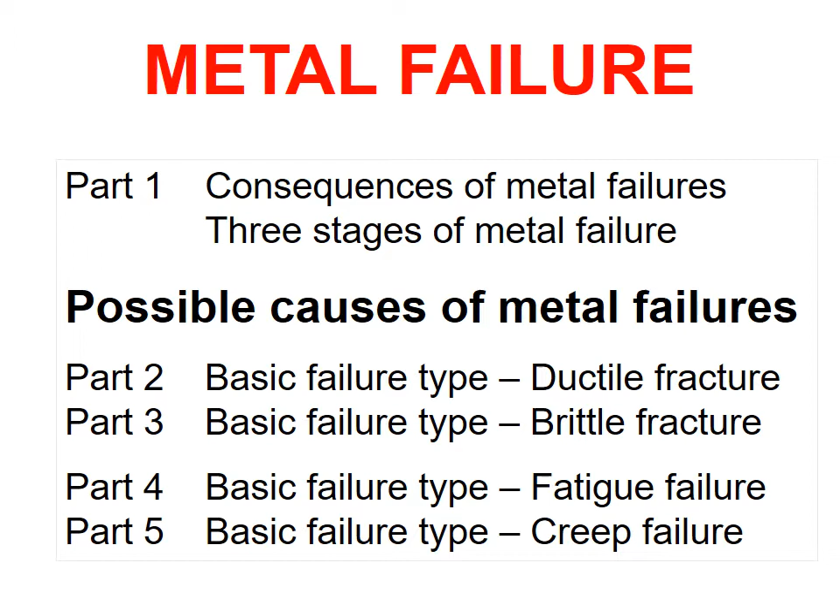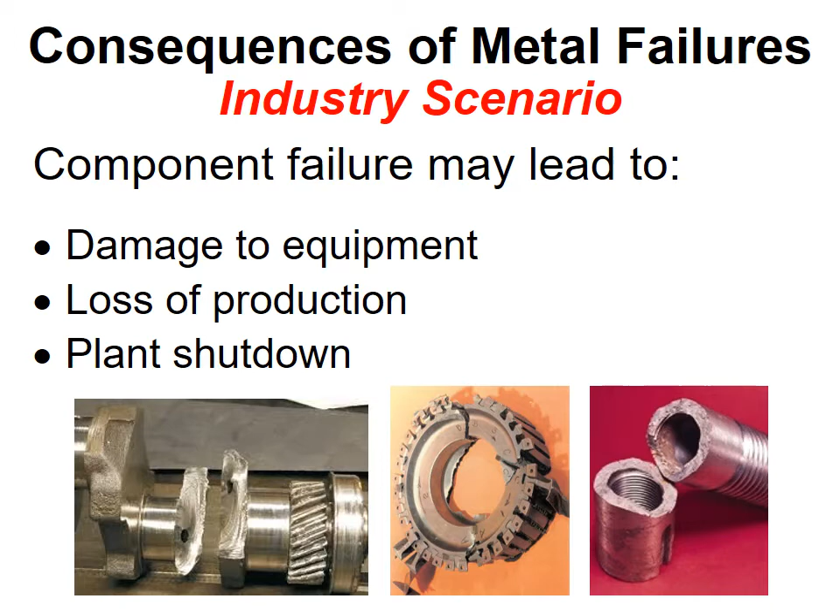In an engineering environment, equipment, or plant machinery, the failure of one unit or even a small component could lead to damage of the equipment and thus may result in shutdown and therefore a loss of production. In a more serious note, failure would inevitably give rise to inconvenience and even the loss of lives. Therefore, understanding the different modes of failure would, in one way or other, help to determine the possible cause or causes of failure and even prevent recurrences.

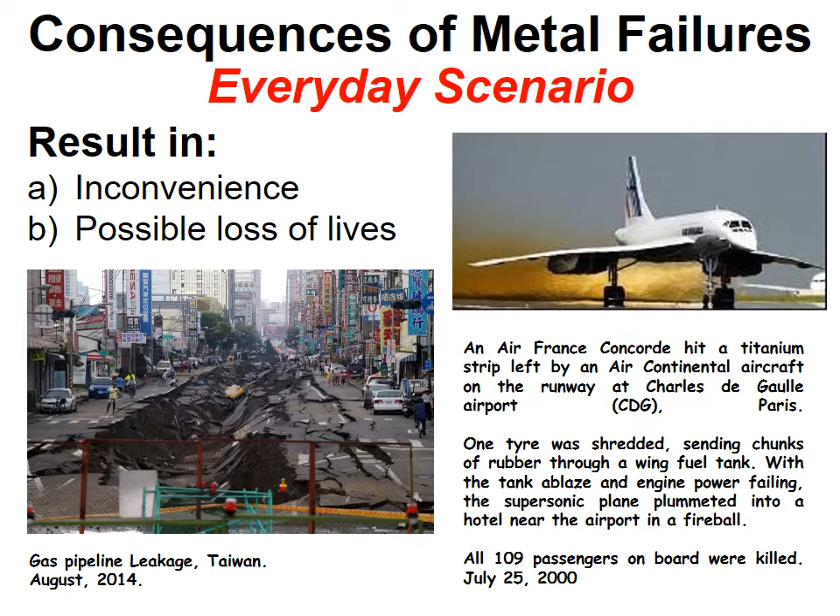Do you know that metal failure was also responsible for one of the worst industrial accidents in history? In Bhopal, India, in December 1984, due to creep failure, a pesticide plant spewed poisonous gases into the atmosphere, and within 48 hours, 1,700 people died. Today, the death toll has reached or even exceeded 20,000.

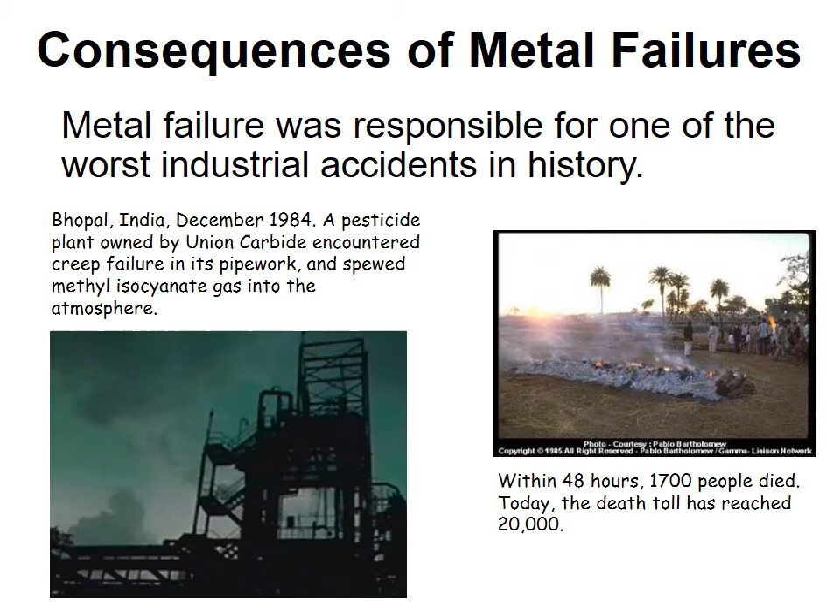Now, let's look at the 3 stages of metal failure. Typically, failures, whether due to cracking, corrosion, poor design or fabrication, environmental conditions or other causes, occur gradually and usually develop in 3 stages. It starts with an initiation point which grows and subsequently results in propagation. The first stage could be detected during manufacture, though it may also develop during operation. The propagation stage is reached when the growth becomes unstable and comparatively rapid.

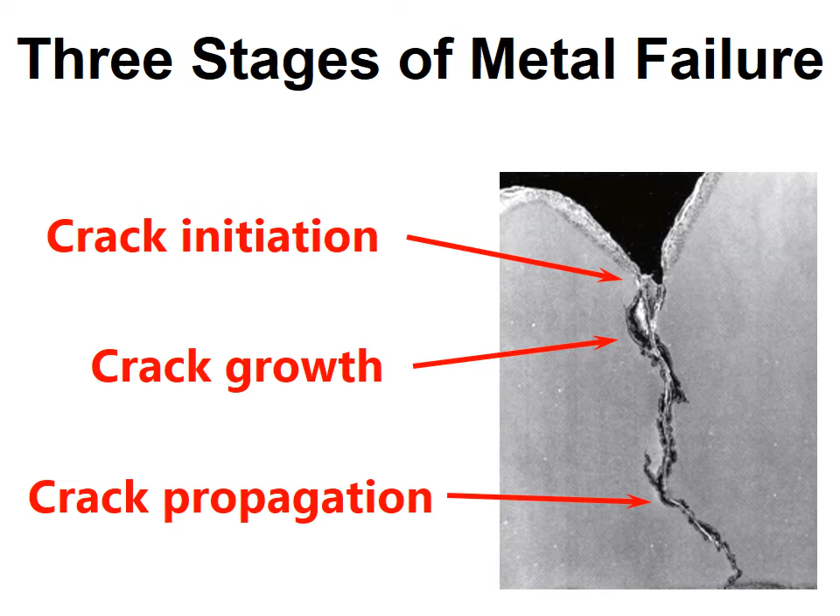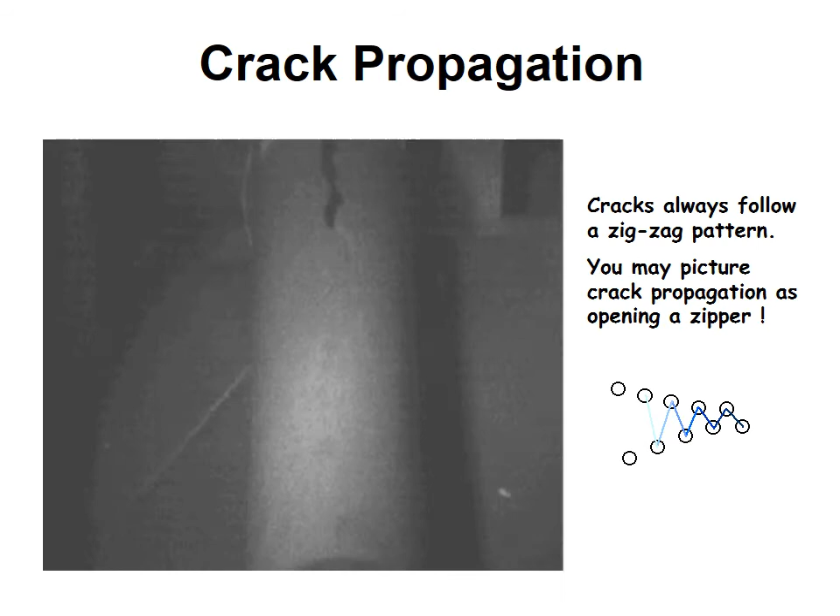With brittle materials, the process may occur with such rapidity, especially if unfavorable environmental conditions are suddenly imposed. When this condition takes place, catastrophic failure will result.

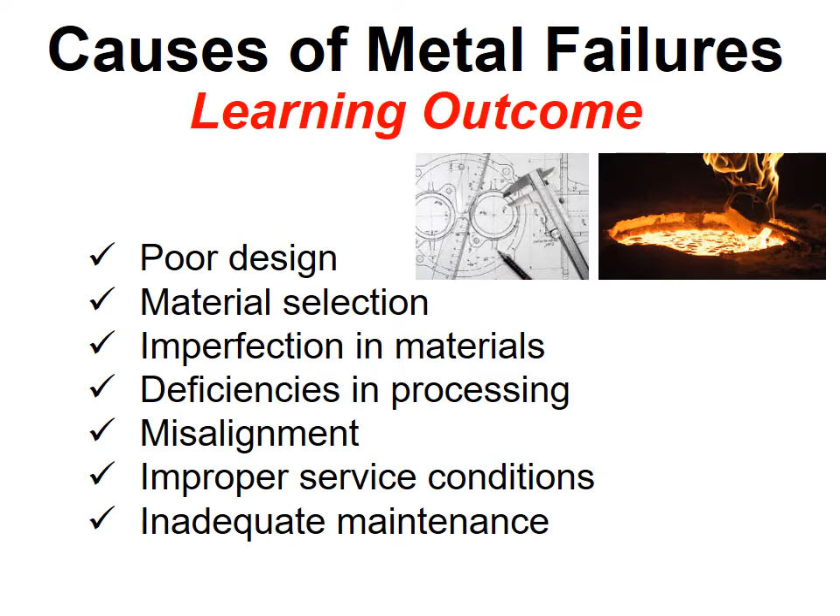Now, let us look at what can cause metal failure, so as to enable us to prevent it from taking place. As such, we'll look into these 7 key areas in our efforts to prevent and avoid failure. We shall start with poor design, followed by material selection, then look at material imperfection, deficiency in processing, and then end with operational causes like misalignment, improper service conditions, and inadequate maintenance.

Poor design. In poor design, this commonly arises from the lack of understanding in the effects of stress raisers, stress concentration locations, or stress distribution within structures. For example, the inadequate use of fillet radius at the change in section of a shaft or a similar part that is subjected to bending or torsional loading.

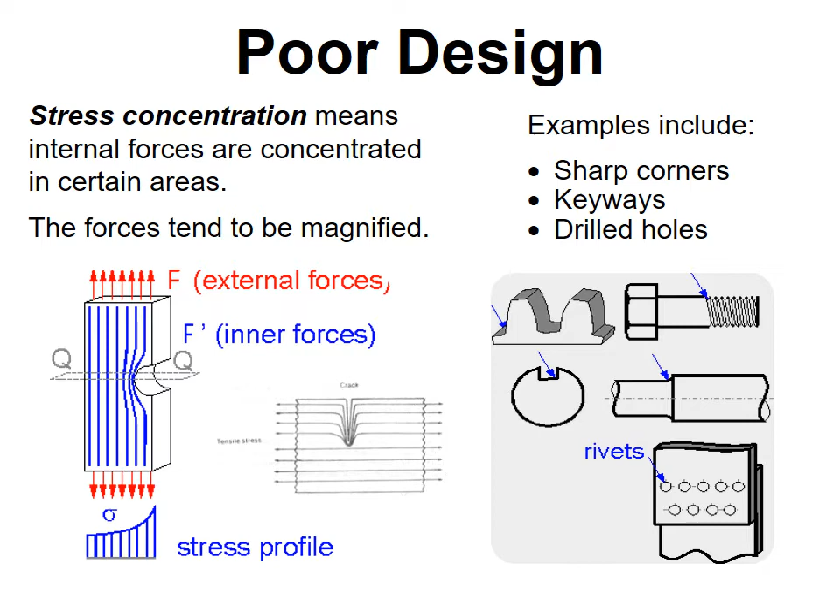Keyways and drilled holes are also sources of stress concentration, which will lead to early failure of metal parts. As such, under these circumstances, try as much as possible to incorporate radius at the corners in keyways and avoid situating holes near each other or the edges.

In material selection, it is very important to take into consideration the operating conditions and requirements right at the beginning in the designing stage. Factors to consider include the type of stress and loading, whether the stress system is static or cyclic, uniaxial or torsional.

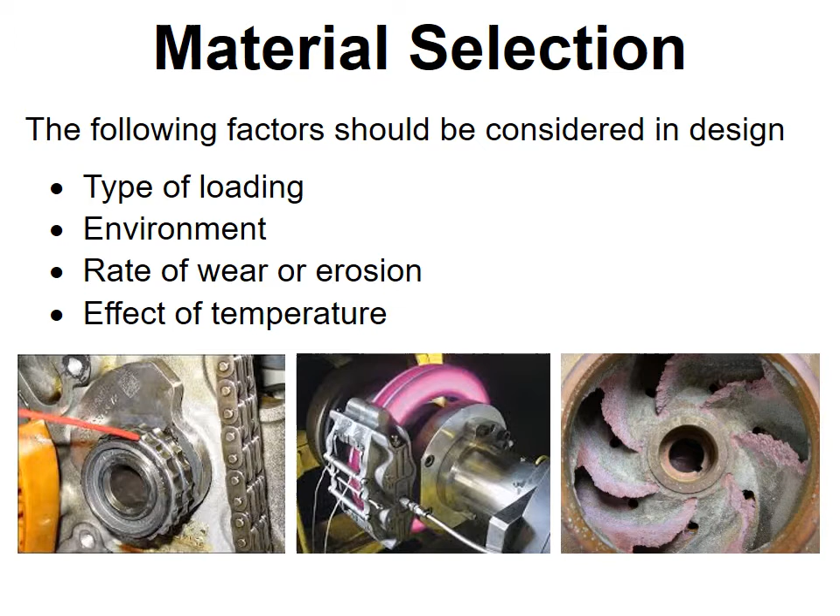We also need to consider the environment. Here, we take the temperature into consideration, humidity, as well as the chemical and contaminants of the environment into consideration. Rate of wear or erosion is also particularly important when time factor is involved. And last but not least, the effect of temperature on its properties, such as ductile brittle transition temperature and creep.

Imperfections in materials. Material imperfection refers to surface defects and internal flaws which can reduce the overall strength of a material. These flaws normally serve as origins for metal failure, and they can behave and act as stress raisers or stress concentration, initiating a crack or inducing crack propagation leading to complete failure. Furthermore, material defects introduced during processing, such as gas porosity, may also be present in cast or welded products.

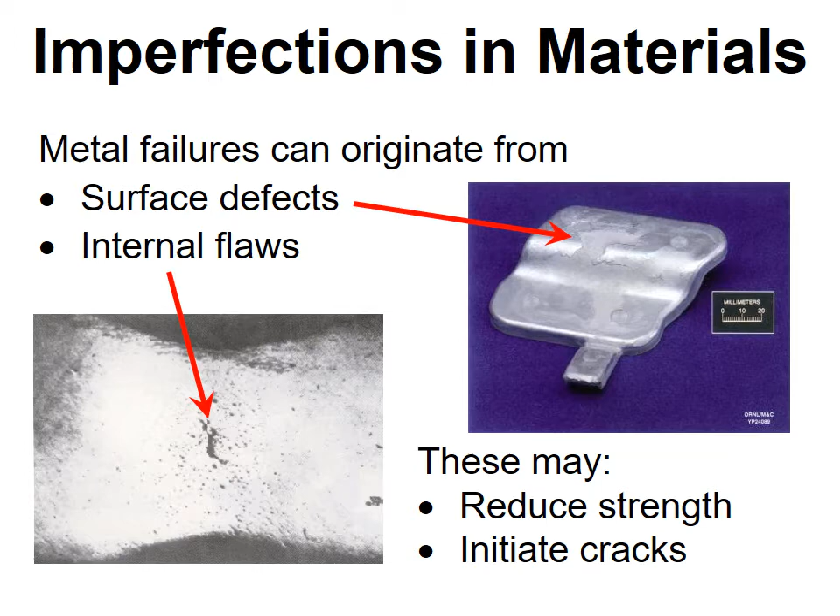Deficiency in processing. Deficiency in processing, such as cold forming and related operations such as deep drawing and bending, produces high localized residual stresses, cracks, microcracks, and loss of ductility. Surface defects and metallurgical changes caused by processing have an influence on fatigue strength, resistance to brittle fracture, and corrosion resistance. Moreover, machining and grinding can also leave residual stresses.

Cracking in hardened steels are also known to result from severe grinding due to overheating and consequent softening.

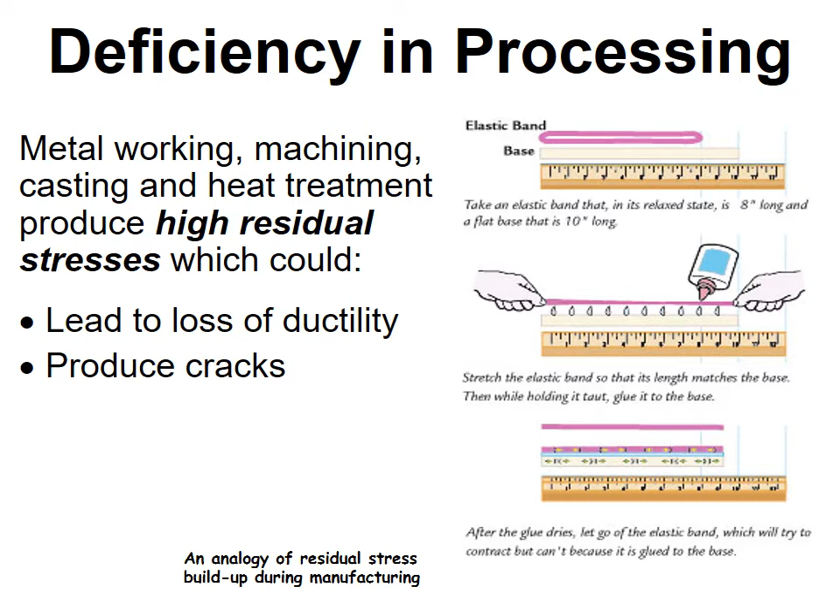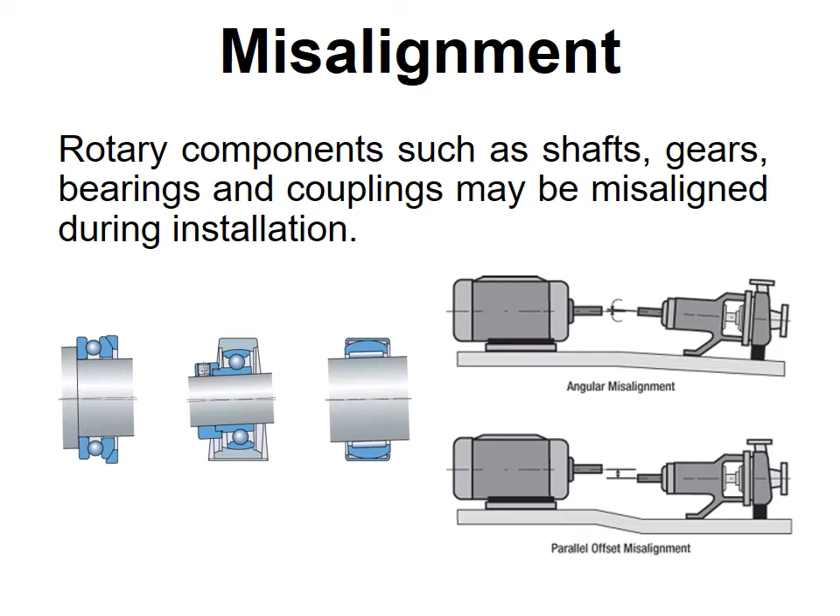Misalignment of rotary shafts, gears, bearings, seals, and couplings is commonly a factor contributing to service failures. It produces additional undue stresses from friction, heat, and vibration, which can accelerate the failure rate, especially through fatigue.

Improper service conditions. Very often, a machine, equipment, or device operates under abnormally severe conditions exceeding that specified by the manufacturer. Exceeding conditions like speed, load, temperature, and type of environment could greatly reduce the life or even cause early failure of the component or machinery.

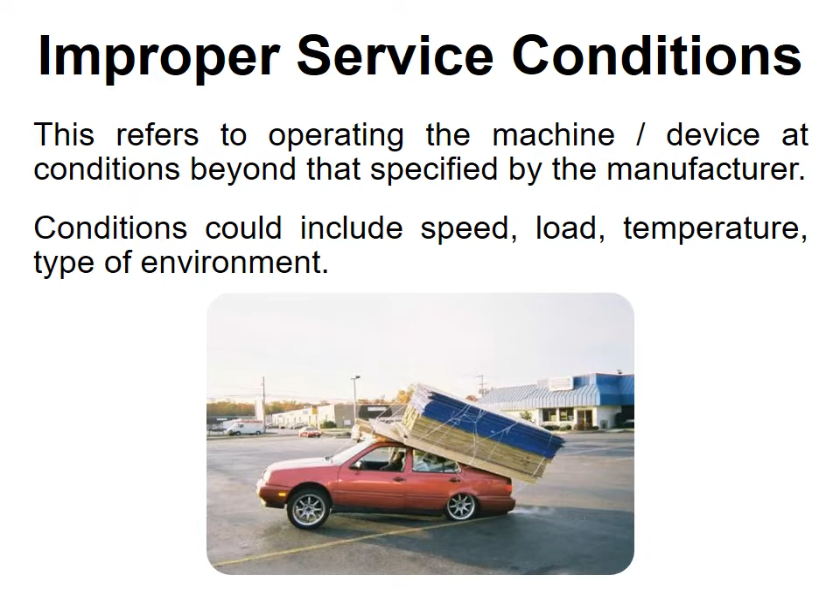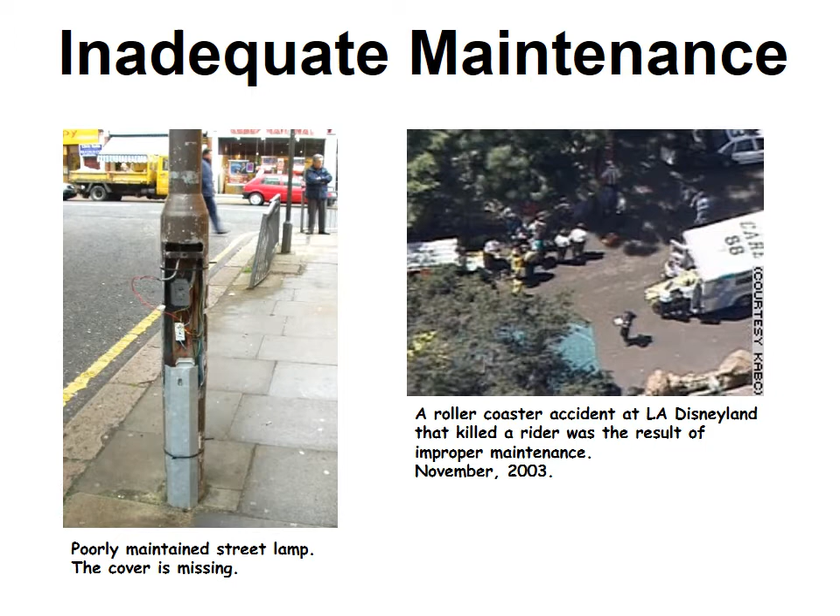Inadequate maintenance is frequently a contributing factor in service failures. Maintenance procedures should be thoroughly re-evaluated when failures reoccur despite regular scheduled maintenance. Testing and monitoring procedures should also be employed regularly at scheduled intervals to check for defects and the rate of deterioration, such as wear and tear.

Now that we have gone through what causes failure and its consequences, let us now look at the 4 failure modes, starting with ductile fracture.

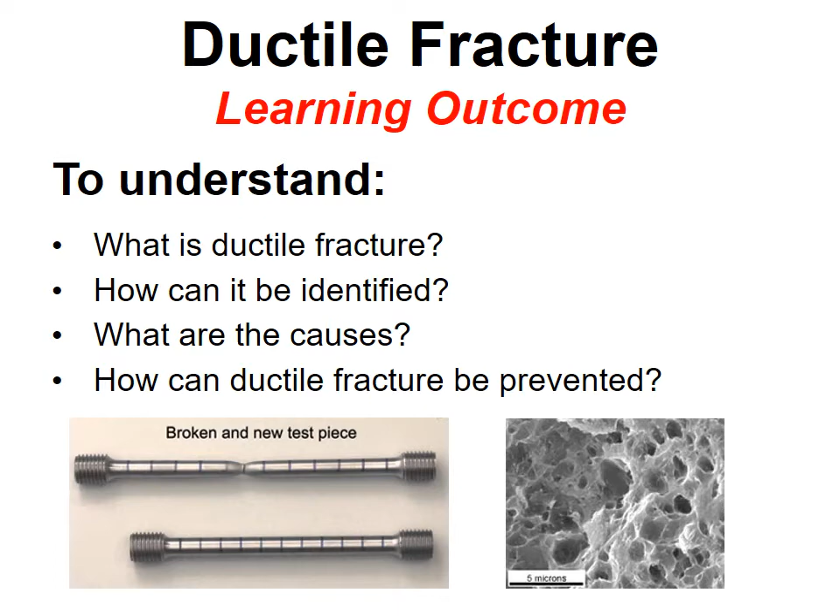Here, we shall ask, what is ductile fracture and how can it be identified? What are the causes and also how ductile fracture can be prevented?

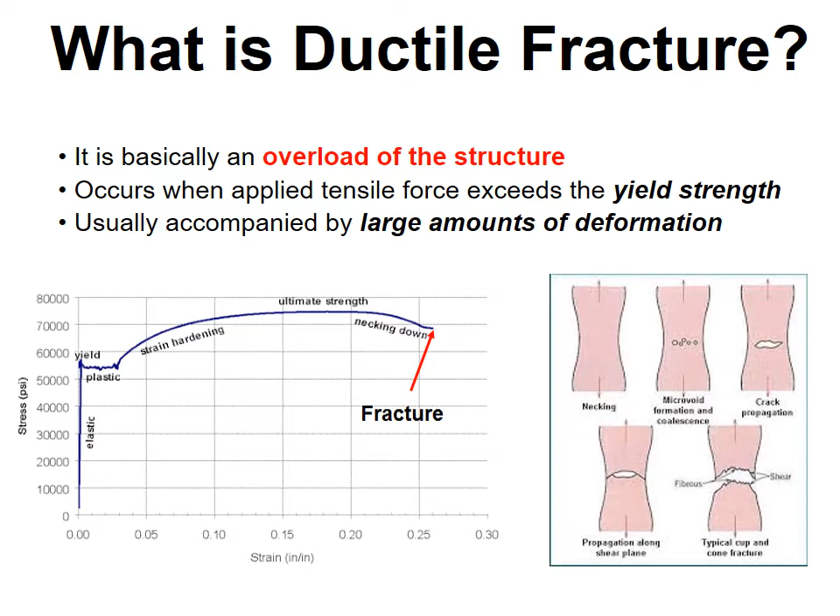Initially, the material will deform uniformly until a neck, which is the thinned down area usually at the weakest point along the loading direction, is formed. Next, within the neck, microvoids will begin to nucleate and form as the material deforms further. This is followed by void growth and it starts to link. At this stage, these voids will have coalesced to form a single bigger void, and tearing then occurs at the surface and fracture finally occurs.

Then, how can we identify a ductile fracture? In summary, as mentioned in the previous slide, a metal subjected to ductile failure shows considerable amount of permanent deformation with a cup cone region. The fracture surface would also be dull, rough, and fibrous.

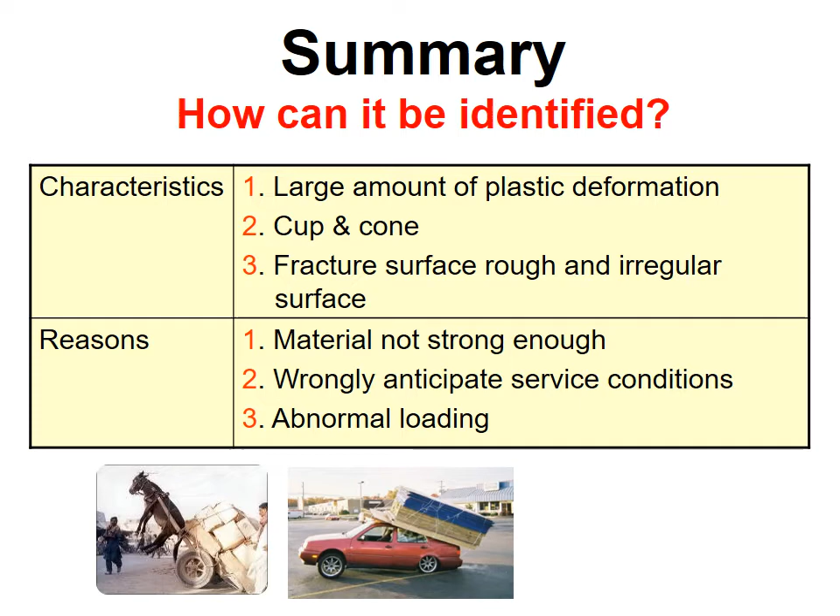As ductile fracture occurs at stresses above its yield stress, this implies that one of the following could have occurred. The material was not strong enough - in other words, incorrect heat treatment could have been performed, or the wrong material was used. Next, the service condition or the loads differed from those anticipated by the designer or engineer.

And lastly, abnormal loading conditions were applied. Before we end on ductile fracture, let's do a quick recap. Firstly, it is important that we know that ductile failure is due to the overloading of a structure or the application of a force exceeding that of the metal's yield strength. Secondly, we have to be able to identify or differentiate it from the other failure or fracture modes.

Ductile failure can be identified by its characteristics of having: 1. Large amount of plastic deformation. 2. A neck with a cup cone region. 3. Its fracture surface looking dull, rough, and fibrous. And lastly, SEM images will show dimples in fractography study.

And last but not least, to know the possible causes so as to prevent ductile failure, we use a stronger material for the first point. For the second point, the engineer will have to calculate, predict, and anticipate as much variation in service condition as possible. He can then redesign or use an alternative material where possible, or incorporate a safety factor to mitigate this failure.

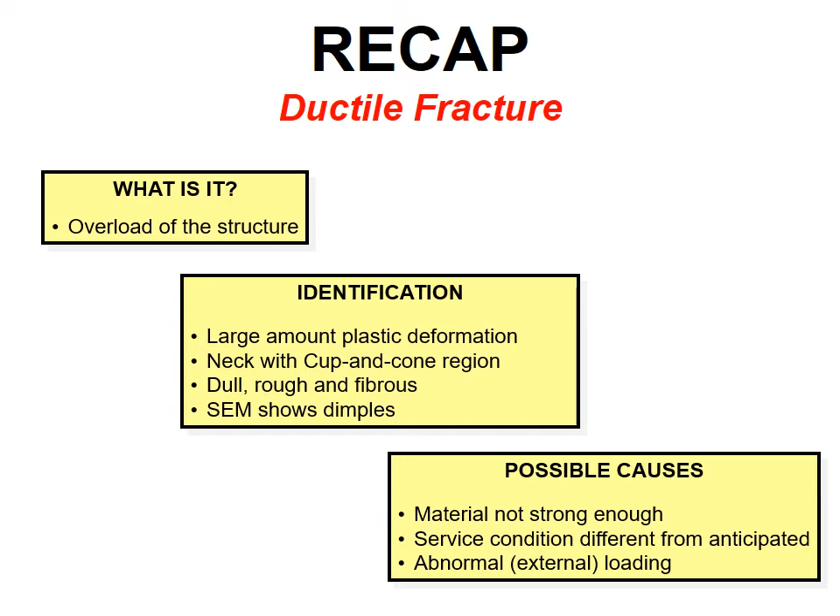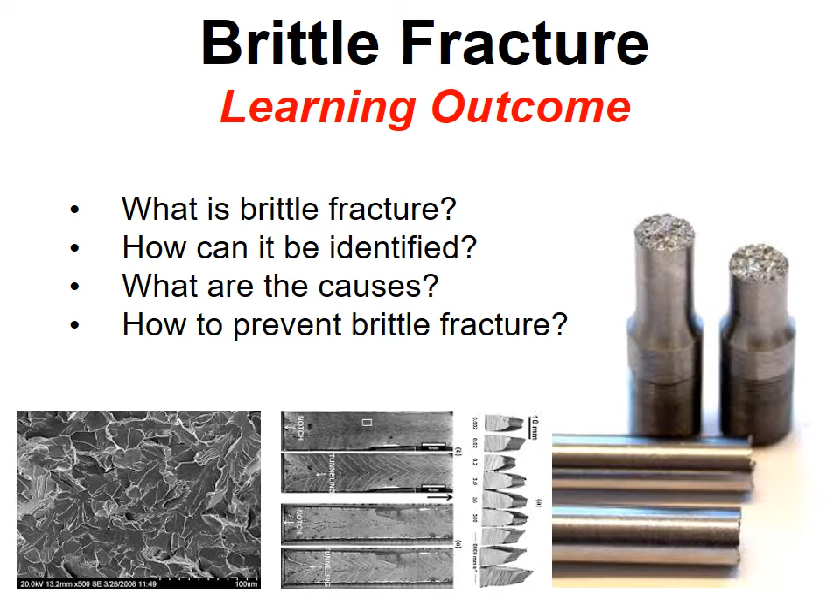The next failure mode that we're going to look at is brittle failure. Here, we'll learn more as to what brittle fracture is and how it can be identified through its characteristics. Similarly, as in ductile fracture, we will also look into the causes of brittle fracture as well as how it can be prevented.

Let's start by asking what is brittle fracture. Brittle fracture is characterized by the very small amount of work absorbed. It typically occurs at low applied tensile stress, with great suddenness, displaying very little to no deformation. In other words, its crack propagation is abrupt and rapid.

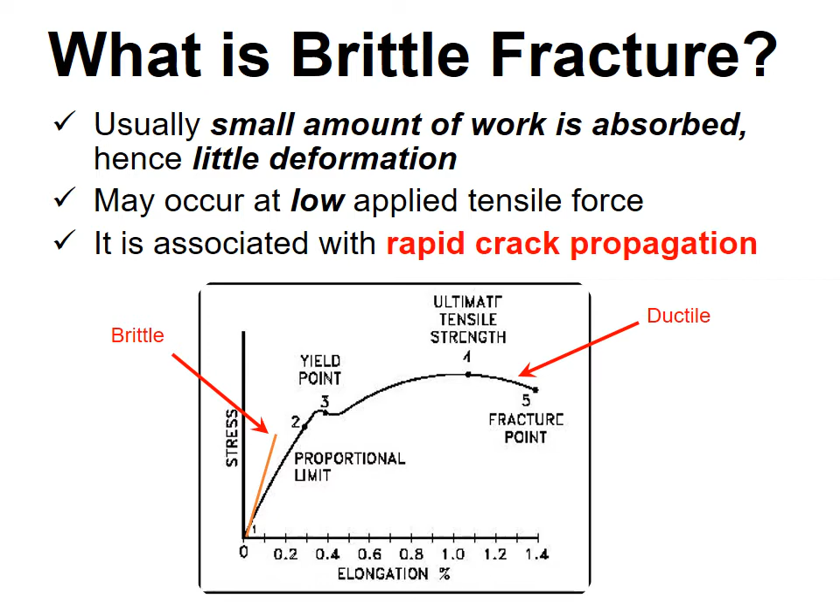From the tensile graph below, we can confirm that brittle failure occurs in the elastic region, and so normally fracture takes place below the yield point. Bearing this in mind, let's proceed to identify a brittle fracture.

As brittle fracture typically occurs within the elastic range, it fractures or snaps with little or no deformation. Its fracture surface is flat and it displays a shiny crystalline appearance, often with chevron or river-like markings. It is important to note that the chevron markings on the fracture surfaces of brittle failures usually point to the source or origin of the fracture, signifying that the failure originated from a severe stress concentration on the surface. The direction of crack propagation will therefore start from the source towards the opposite end.

In fractography, scanning electron microscopy imaging shows cleavages for brittle failure, as its crack propagation is rapid, unlike that of a ductile fracture which shows dimples.

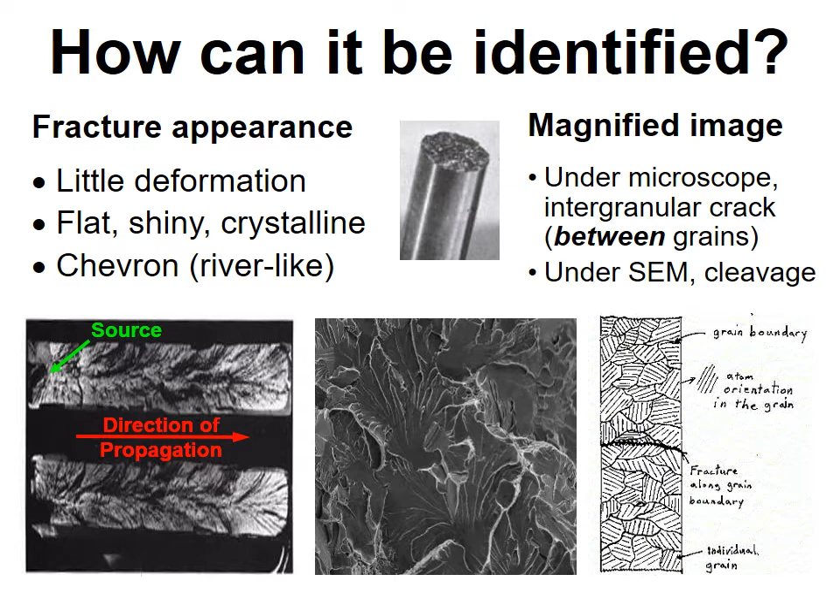Besides knowing how to identify a brittle fracture, it is important to know what causes it too. For brittle failure to happen, three conditions are required. Firstly, the ambient temperature is below that of the transition temperature. I will go in detail in the next slide.

Secondly, the presence of a notch. This can be a design feature, pre-existing crack, or a sharp defect. This attribute presents itself as a severe stress concentration point, magnifying the applied stress at the notch tip. An applied stress might be amplified or concentrated at the tip of the notch, encouraging fracture to occur.

The magnitude of the localized stress depends on the geometry and orientation of the crack or notch. And lastly, the existence of a tensile stress. To produce any fracture, a tensile stress is required in the material. This tensile stress may be an externally applied loading or an internal residual stress, usually a combination of both.

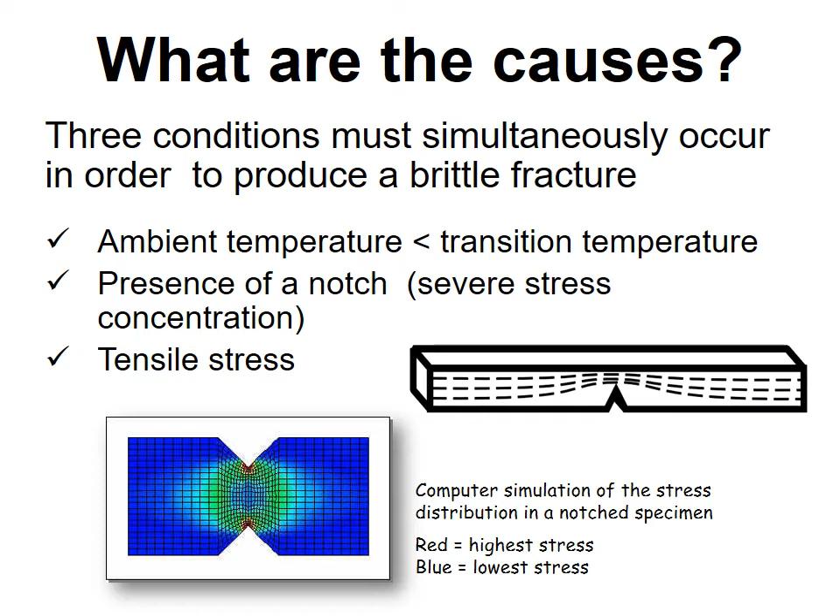As mentioned in the previous slide, let us now discuss further on the ductile brittle transition temperature, also known as DBTT in short. DBTT is defined as the range of temperature over which the fracture mode of a metal when notched rapidly changes from that of ductile to brittle. It should be noted that only BCC metals have a ductile brittle transition temperature.

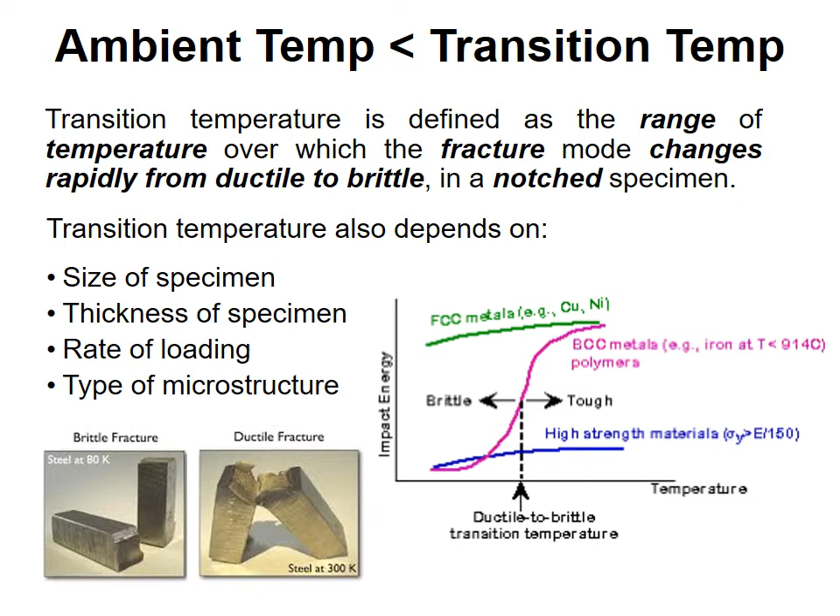The transition temperature therefore depends on the size and thickness of the specimen, the rate and magnitude of the loading, and last but not least, the type of microstructure, which is, yes, BCC metals.

Let's now look at how we can obtain the ductile brittle transition temperature, or DBTT, of a BCC metal. The transition temperature is usually determined by using the Charpy V-notch test. In this test, the Charpy impact tester releases a heavy hammer attached to a pendulum from a known height to strike and fracture a notch sample over a range of temperatures.

By plotting the result of the energy absorbed against temperature, the change of transition in fracture mode occurring over a range of temperatures can be found, and the DBTT is then determined using the mean energy approach on the energy to absorb fracture.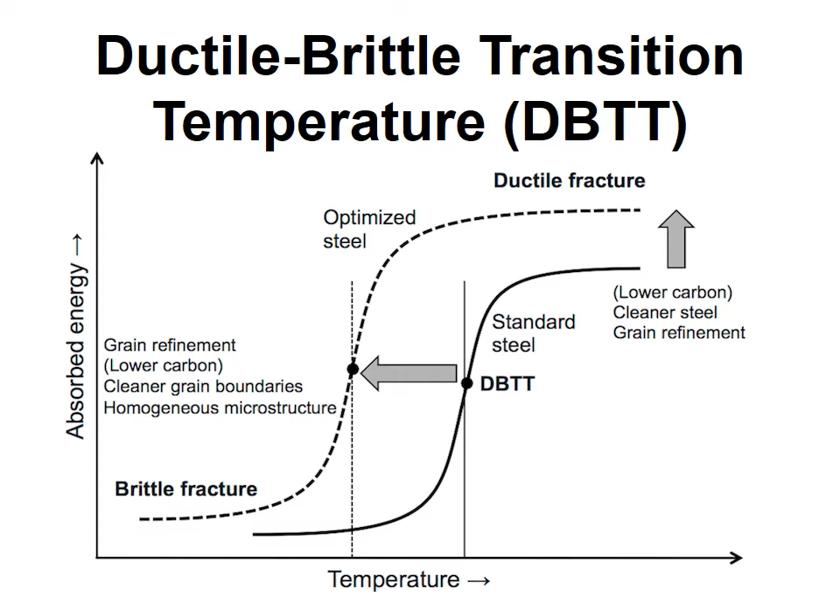Comparing the optimized steel to that of the normal steel, it can be seen that the standard steel starts to dip at a higher temperature as compared to the optimized steel, and therefore it will become brittle earlier and loses its ability to absorb shock should the temperature begin to drop.

So, how do we prevent brittle fracture? Brittle fracture may be prevented by removing any of the three conditions necessary to cause it. If you still remember, the first is ambient temperature below that of the transition temperature. Second, the existence of a notch, and lastly, the presence of a tensile load.

Alternatively, brittle fracture can be mitigated by the following: decreasing the carbon content to below 0.15%, or reducing the metal's exposure to high impact by decreasing the loading or impact rate.

Subsequently, we can try to reduce the stress concentration and stress raisers at the surface by decreasing the notch depth or increasing the notch radius. And last but not least, by modifying and refining the microstructure by increasing nickel content to 2 to 5%, or reducing the grain size by adding grain refining elements such as aluminium and niobium.

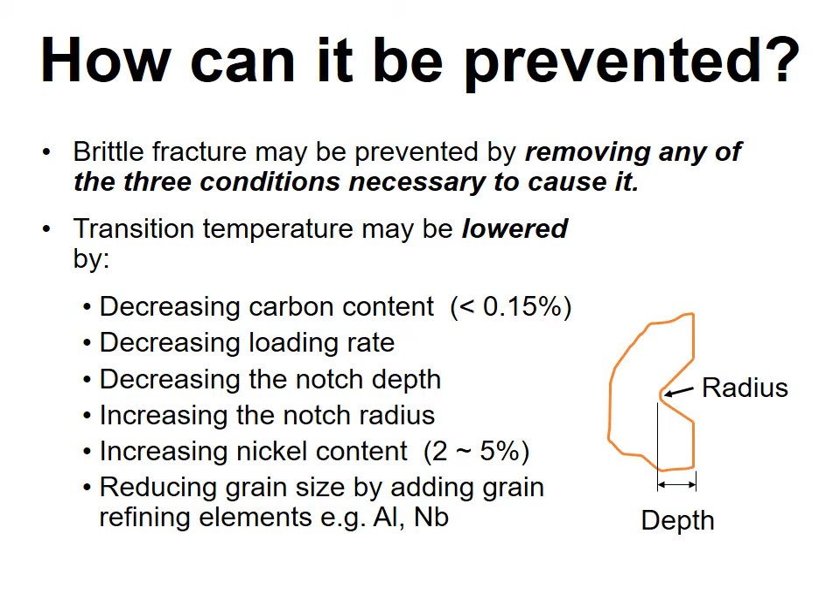Now that we have come to the end on brittle failure, let's do a quick recap. Firstly, we must understand that brittle failure is associated with rapid crack propagation. Brittle fractures can usually be distinguished from ductile fractures by an almost complete absence of plastic deformation.

Fracture occurs at stresses below the yield stress and are often flat and shiny. It is possible to trace the fracture path to its origin by interpreting the chevron markings on the fracture surfaces. With a brittle fracture, the fracture origin is often a notch or a small crack, usually on the surface. When examined microscopically, brittle fracture may be transgranular or intergranular, and scanning electron microscopy images reveal cleavages.

So, what causes brittle failure? As discussed previously, the three factors are ambient temperature lesser than transition temperature, presence of a notch, and thirdly, the existence of a tensile stress. Therefore, to prevent brittle failure, we can remove the above causes.

For the first point, we can ensure that the DBTT of the metal is below the operating temperature of the metal. And for the second, we can improve the surface condition or redesign where possible to reduce or remove stress concentration points.

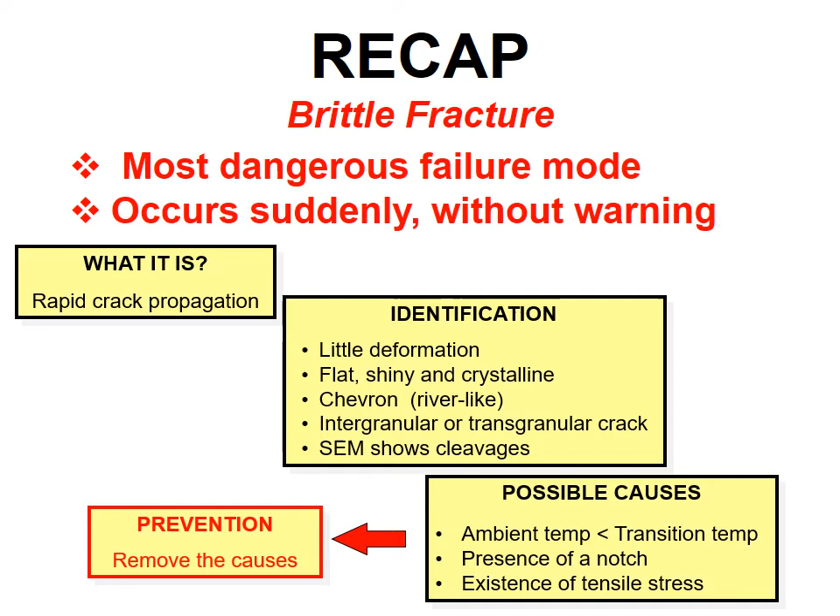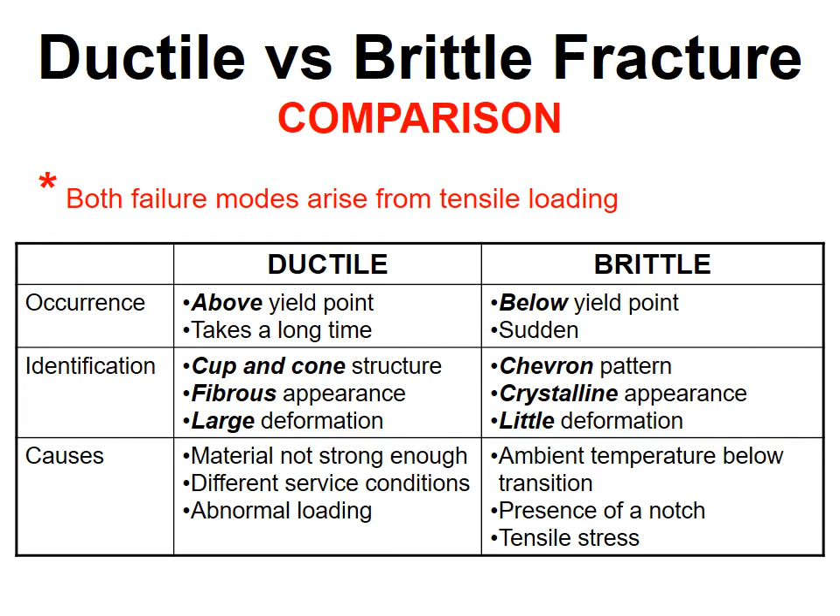In this slide, I've summarized and tabled a chart comparing side by side the differences in occurrence, identification, and causes between ductile and brittle failure. So, do pause the lecture video and take a few minutes to review the table.

Similar to previous sections, let's now look at the learning outcome for this section on fatigue. I will start with what is fatigue failure. Then we'll look at how it is quantified and how to identify it. Knowing this, we'll then look into the causes and how to prevent fatigue failure.

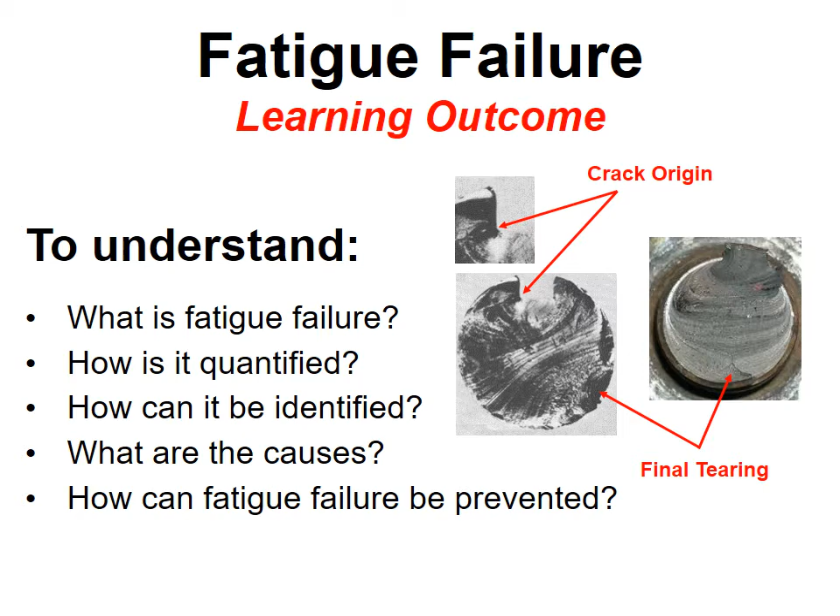The term fatigue is used to describe the failure of a material under a repeatedly applied stress. For this failure, the stress required to cause failure, if applied a large number of times, is much less than that necessary to break the material or metal with a single pull. These stresses are usually dynamic and change with time, for example in live loads, temperature, pressure, wind loads, or even seasonal changes.

Additionally, the change in stress loading can be cyclical or random. A key point to note about fatigue is that a component can fail even though the maximum stresses applied to it are less than its yield stress, and it accounts for approximately 90% of all mechanical failures.

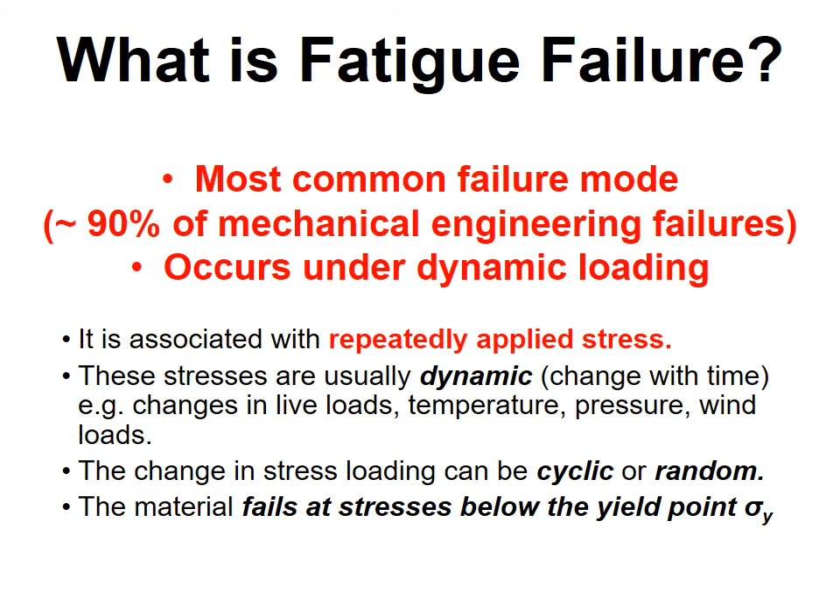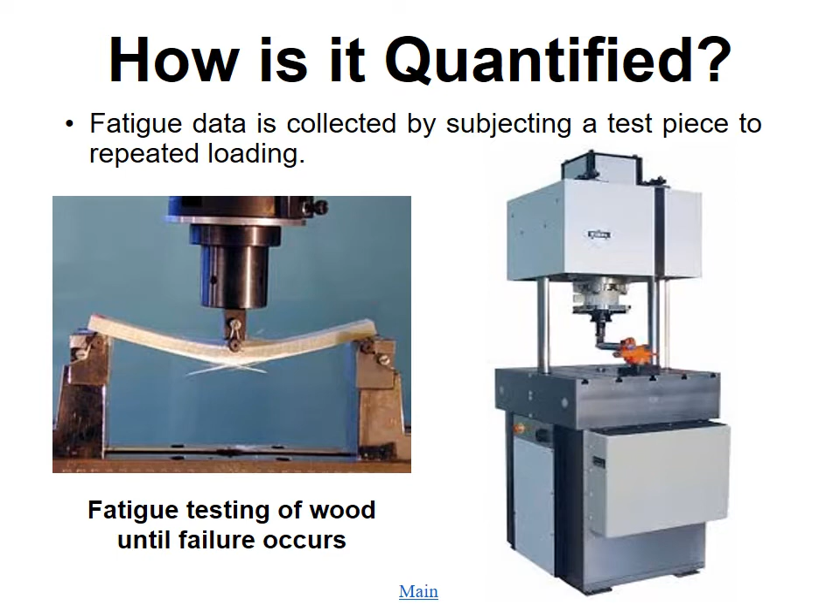As such, how can we measure or quantify fatigue? The fatigue properties and data of a material can be obtained by subjecting it to repeated loading using a Wöhler machine, as shown in the slide here.

The total number of cycles to failure is then recorded, and a stress cycle curve is plotted, from which we can establish the relationship between the stress and the number of cycles to failure for any given particular type of loading.

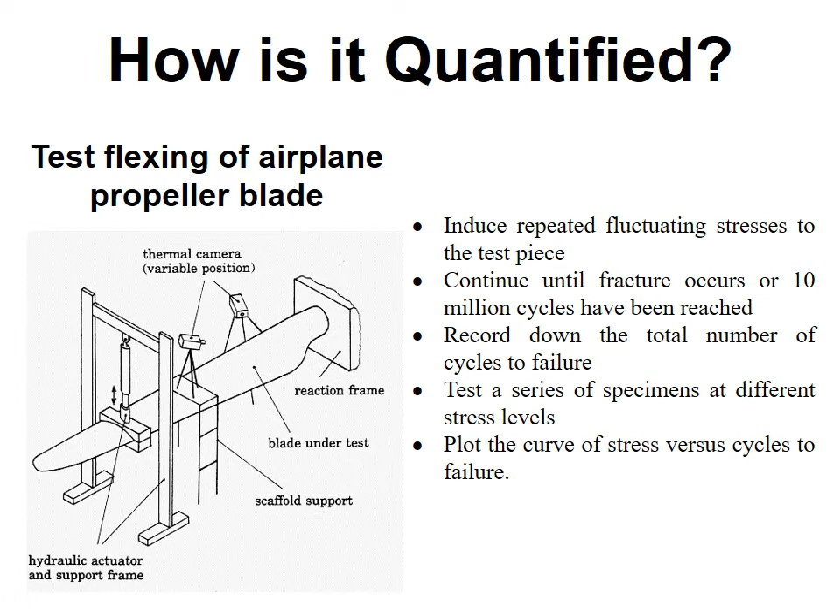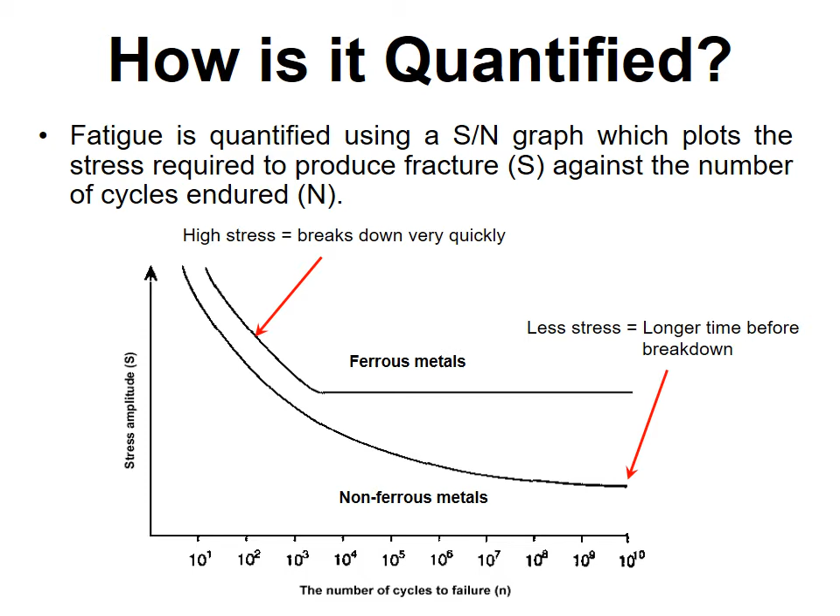Now, let's take a closer look at fatigue limit, which is also commonly known as the endurance limit. It is interesting to note that there are two types of fatigue behavior that are commonly encountered. The first, like the one at the top with a horizontal section, is commonly associated with ferrous metals like different types of steels.

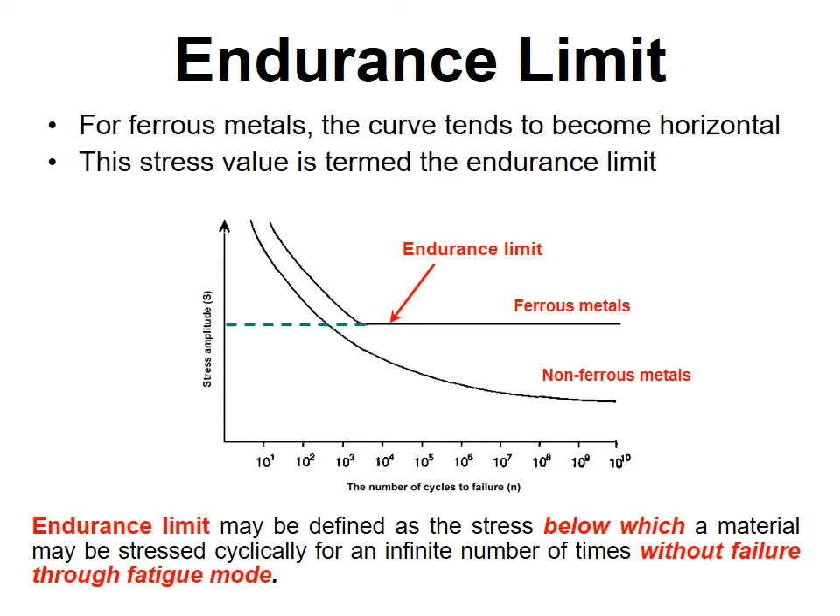Whereas the second curve is commonly associated with non-ferrous metals and alloys like magnesium, copper, and aluminium, etc. The fatigue or endurance limit is thus defined as the limiting stress below which a metal will withstand an indefinitely large number of cycles of stress without failure by fatigue.

In the latter case, as mentioned earlier for the lower curve, when non-ferrous metals do not show true endurance limits, the term endurance strength is used. It is defined as the stress at which fatigue failure would not occur before a specified number of cycles.

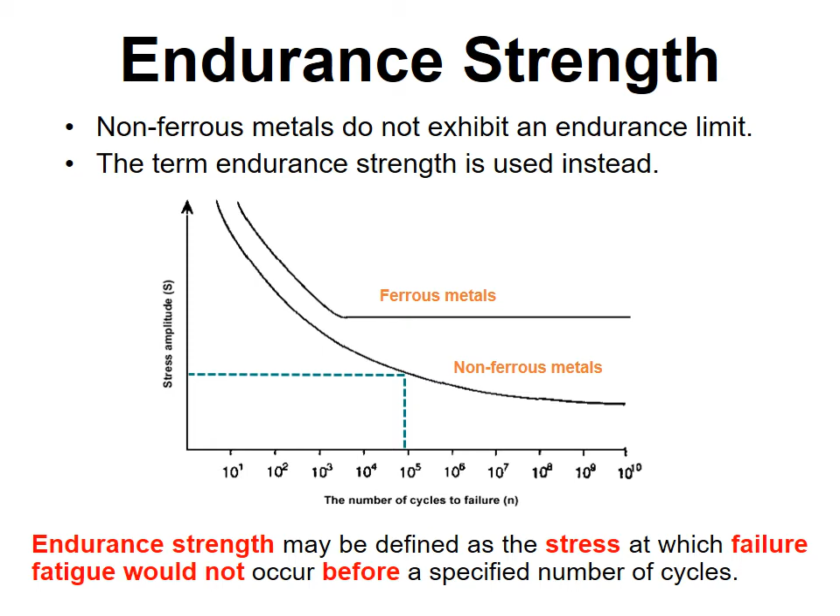Now that we have learned how to quantify fatigue failure, let us now look at how we can identify it. Fatigue fractures exhibit little or no visible signs of deformation, and for this very reason, it is very difficult to spot, particularly at the beginning stages.

A fatigue fracture usually starts at a point of high stress concentration, normally a crack or a very narrow opening at the surface, which then advances and grows as the stressing is repeated until it extends through a considerable part into the material. When the crack reaches a critical mass, final fracture then occurs suddenly and disastrously.

Although fatigue fracture is brittle in nature and does reveal areas of brittle fracture under fractography examination, the fracture surface has a unique appearance that is different from that of brittle failure.

It consists of two areas where one portion is smooth and shows beach mark striations spreading out from some discrete points indicating where the fracture was initiated. These striations are often a feature of service failures associated with non-uniform conditions and intervals of rest.

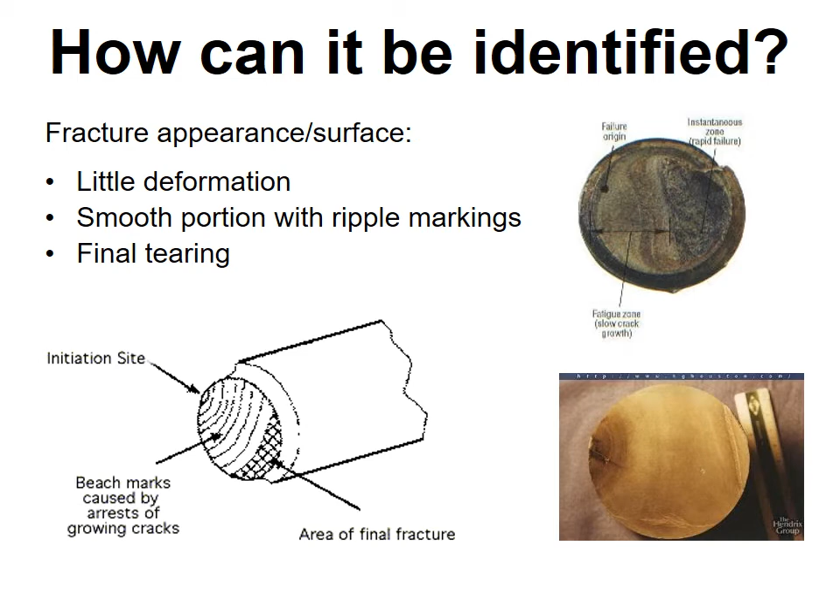The remaining surface, which indicates the final tearing, will display either a crystalline or fibrous appearance and therefore can be a brittle or ductile fracture or even a combination of both, and this occurs when the area can no longer sustain the load.

To combat fatigue, we can target its source. Since fatigue usually starts at a point of high stress concentration, which may be a design feature, a crack, or a very narrow opening at the surface, we can reduce the stress concentration by improving on three key factors: improving the design at the beginning during the designing stages; improving or selecting the most appropriate processing method; and improving the surface conditions, such as introducing compressive stresses.

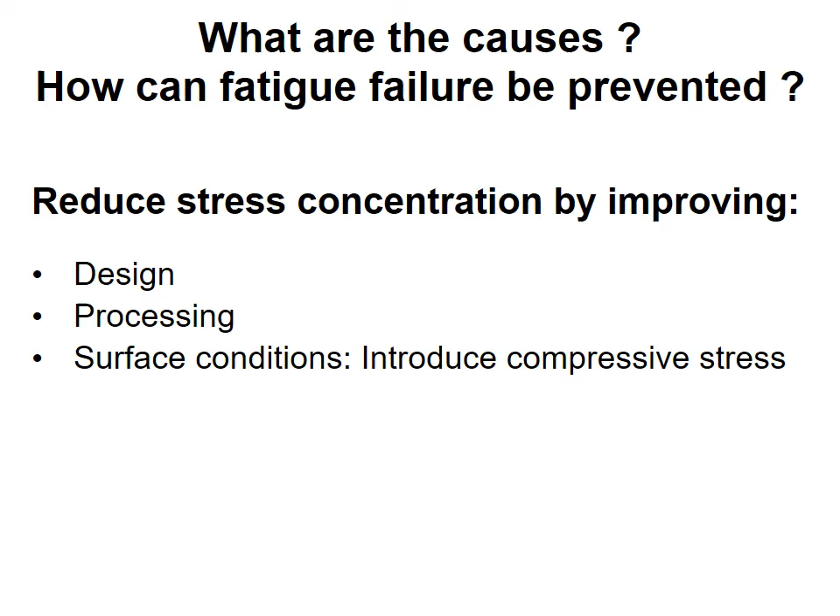Remember this earlier slide? Let's recap and take a look at the specimen with holes drilled near each other, or other forms of stress raisers like notches, keyways, screw threads, machining marks, and other irregularities. These artifacts produce stress concentration at these points and raise the level of stress, and therefore should be minimized, as these can act as starting points for fatigue failures in the material, lowering the fatigue life of the component.

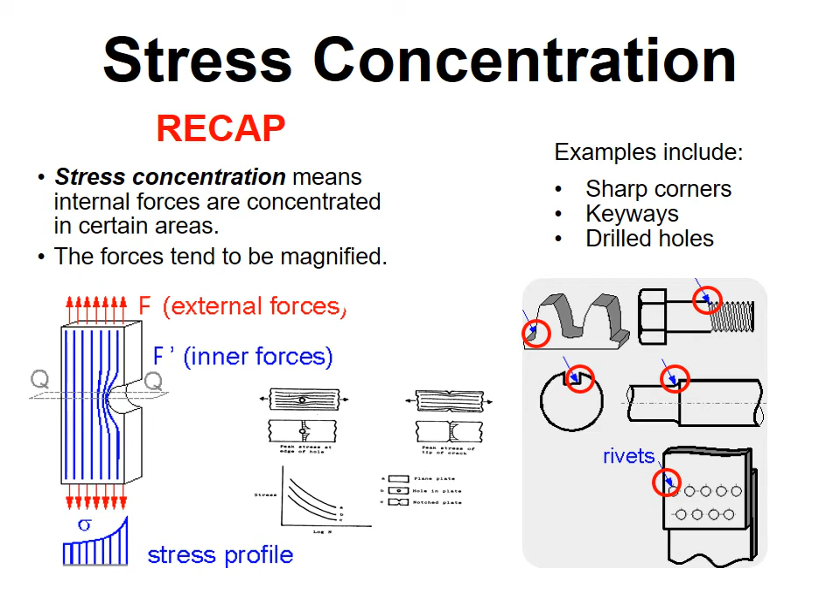Bearing in mind what we have just discussed, it is important to minimize and/or avoid creating such areas of stress concentration during the design stage where possible. For example, we can have rounded contours, add generous radius, fillets, chamfers to sharp corners, and redesign components to have a more uniform section, for example, a tapered shaft instead of a stepped shaft.

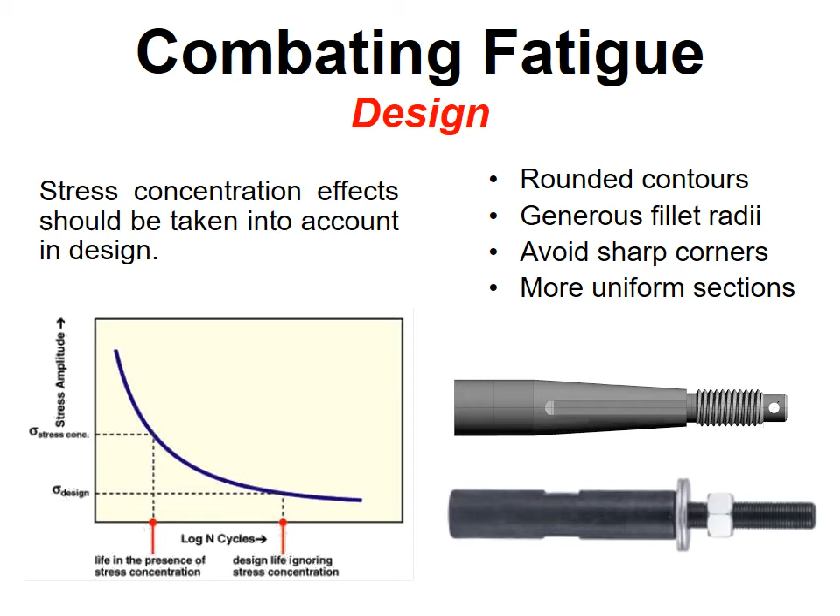Additionally, stress concentrations can also be introduced during processing and should be avoided. Avoid welding and adopt a forged and machined part instead, as the high intensity heat and temperature gradient of the welding seam to the surrounding material can generate internal stresses due to microstructure changes and non-uniform cooling. Defects such as cracks, voids, and inclusions are characteristic of certain processes like casting and powder processing methods, and care and efforts must be taken to reduce them.

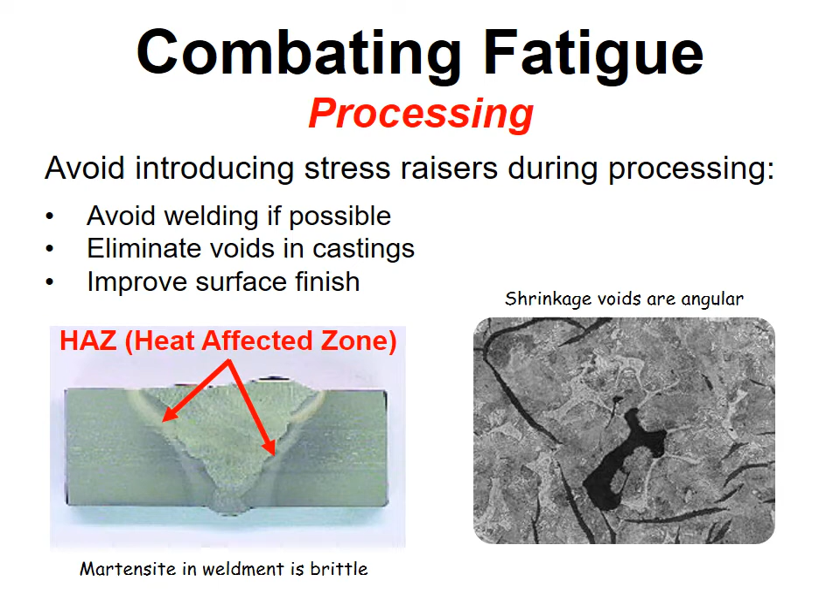Additionally, as fatigue usually starts at the surface from a surface defect such as a crack, a scratch, or surface roughness, the surface finish should thus be smooth and flat, and this could be achieved by grinding, lapping, or polishing.

With the surface being the most vulnerable area susceptible to defects, as previously discussed, besides improving the surface texture, we can also harden the surface to improve fatigue resistance.

We can achieve this in three ways: shot peening, cold rolling, and case hardening, where the fatigue strength of a metal is improved by introducing residual compressive stresses to the surface layer to counter the effects of tensile stresses during operation of the part. These compressive stresses can be introduced by distorting the crystal grains at the surface through shot peening, where a stream of steel shots is made to impinge on the surface, or by cold rolling, where the metal is inserted between rollers and then compressed and squeezed.

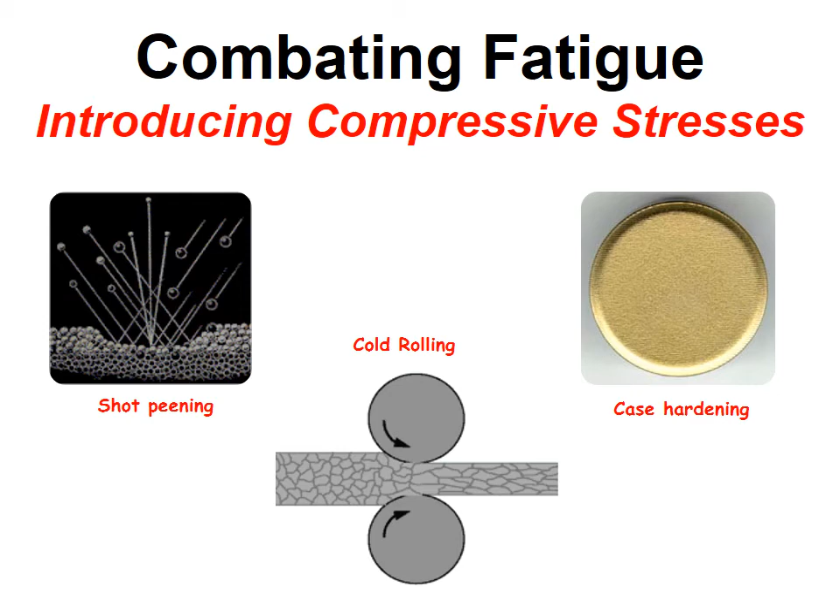In case hardening, a hard surface layer containing nitride or carbide phases is produced by allowing nitrogen or carbon to diffuse into the surface of the steel at elevated temperatures. This nitriding and carburizing process will be covered in greater detail in Chapter 6.

Now, before going into our last failure, creep, let's summarize and recap what we've learned on fatigue. It's the failure of a metal under cyclical dynamic stress. It shows little or no deformation, and its fracture surface normally shows two areas: one portion is smooth, displaying beach mark striations spreading out, and the other portion is the final tearing zone. The cause is due to stress concentration originating from stress raisers like notches, keyways, screw threads, machining marks, and other irregularities.

To prevent fatigue as far as possible, avoid stress raisers in the design stage, and avoid introducing stress raisers during processing. Alternatively, we can try to improve the surface condition by introducing compressive stresses through methods like shot peening.

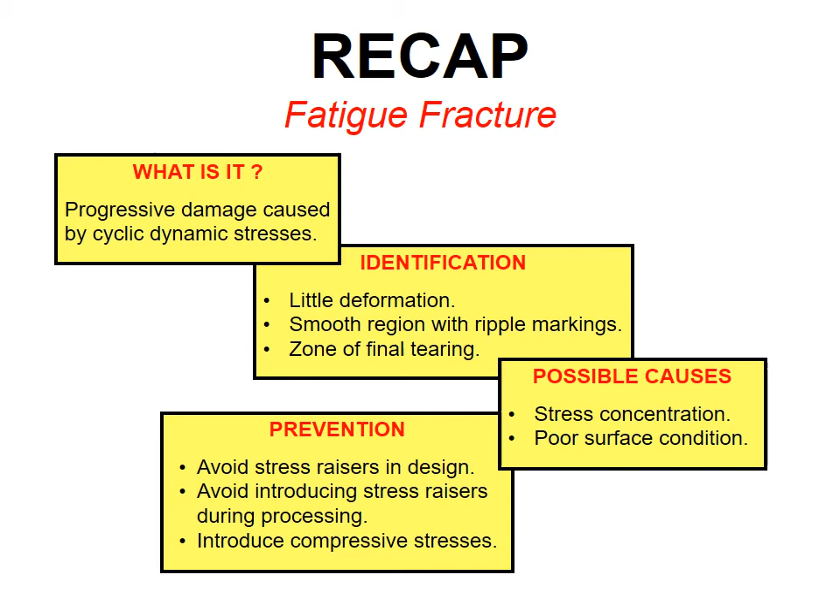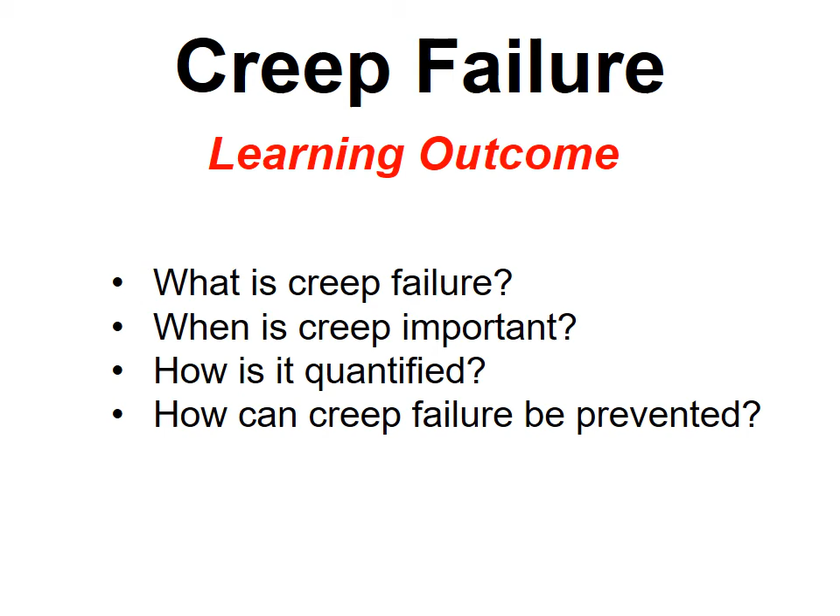Creep is an important topic in metallurgy, and for an engineer in charge of selecting metals and materials, this is a subject he must be aware of. Creep-related failures can happen frequently and are hazardous to both property and human life. So in this section, like before, we will ask what is creep failure, and instead of why, we ask when creep is important, then proceed to quantify it and see how to prevent creep.

So, what is creep? Creep is a type of metal deformation that occurs at stresses below the yield strength of a metal, most noticeable at elevated temperatures, and metals that undergo excessive creep deformation can oftentimes fail completely. From year 1, we have learned that the yield strength defines the stress at which a metal begins to deform plastically. As such, creep is unique in the fact that it is a phenomena whereby a material can plastically strain even though yield stresses have not been reached.

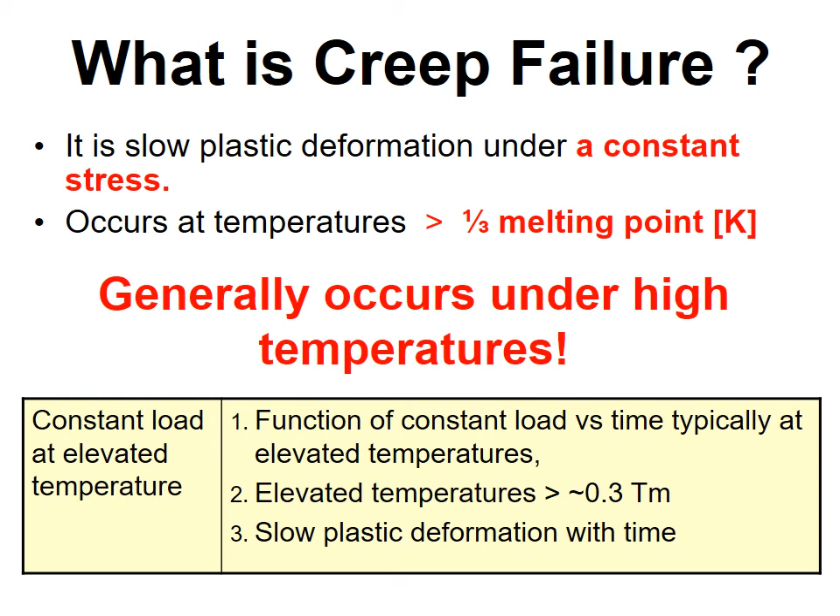So, creep is defined as a time-dependent plastic deformation under constant stress at elevated temperature. With regards to the temperature, it becomes especially important for metals when the operating temperature is greater than 1/3 the melting point in Kelvin.

So the question now is, when does creep become important? It becomes important when metals and alloys are stressed at a temperature in excess of about 1/3 the melting point in Kelvin. For example, lead and tin, whose melting temperature is approximately 327 degrees and 231 degrees respectively, can creep at room temperature, while molybdenum, tungsten, and nickel-based alloys creep at about 1000 degrees Celsius.

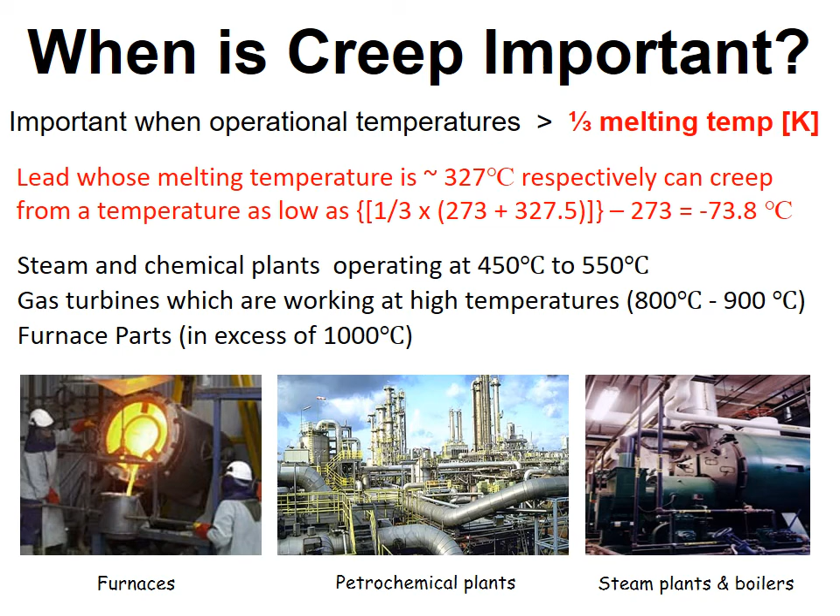Let's look at an example. The creep for lead after calculation can take place from a temperature as low as negative 73.8 degrees Celsius. As such, it is important when considering what metals to use for steam and chemical plants that operate at 450 to 550 degrees, or gas turbines which are working at higher temperatures of between 800 and 900 degrees, or even higher, in excess of 1000 degrees for furnace parts.

Primary creep is the first stage of the deformation process. At this stage, plastic deformation is initialized. During the primary creep stage, this deformation occurs more rapidly at first and then slows down with time. The reduction in the creep rate could be interpreted metallurgically as a result of strain or work hardening. In other words, dislocation movement is becoming more difficult.

Secondary creep then takes over. In this stage, the strain rate begins to stabilize and becomes constant and occurs relatively slow when compared to the first stage and the final stage of the creep. This is because no microstructural damage has taken place yet, as work hardening is balanced out by thermal softening. During this stage, the grain size will also affect the strain rate, as metal with finer grains will creep faster than metals with coarser grains.

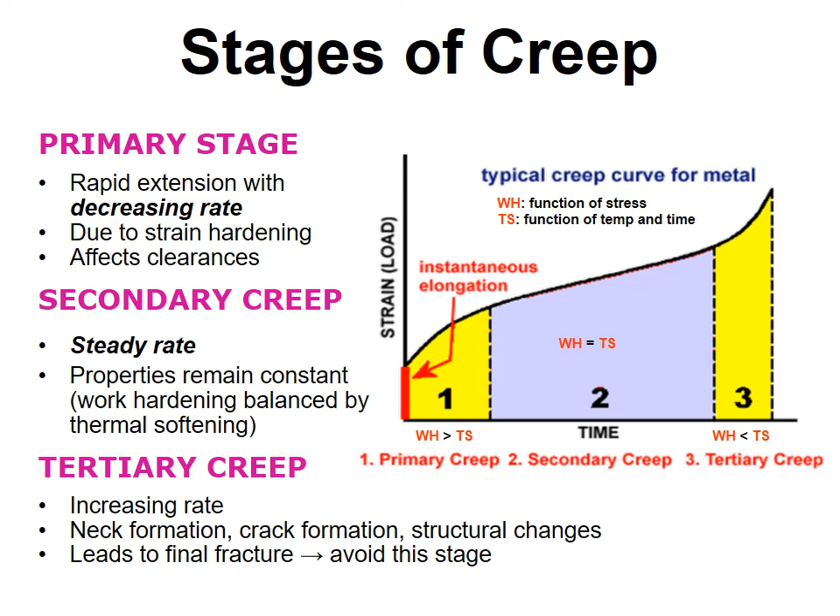Then, how is creep quantified? Creep can be quantified using a creep curve which plots the strain versus the time. Creep, besides the constant load, is temperature dependent. The higher the temperature a metal is exposed to, the higher the creep strain. Likewise, the stress induced on the part.

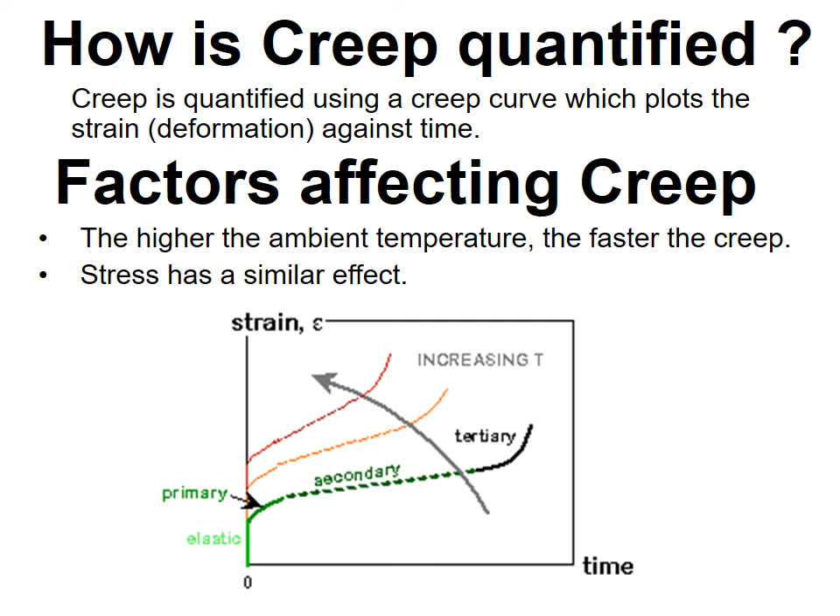Bearing all this in mind, let's see how we can prevent creep. The effects of creep can be circumvented or reduced through several different methods. One way to reduce creep is to lower the working temperature that the metal being used is exposed to. As this is not always possible, a higher melting point metal or alloy should be considered instead.

Another method is to reduce the constant load that the metal has to withstand. But again, this may not be achievable depending on the situation or application. Using a large grain or single crystal alloy can also help reduce creep due to less grain boundary slip that occurs. And last but not least, certain metals can be strengthened with specific alloying elements. These can avoid creep by eliminating microstructural vacancies through solid solution strengthening and precipitation hardening.

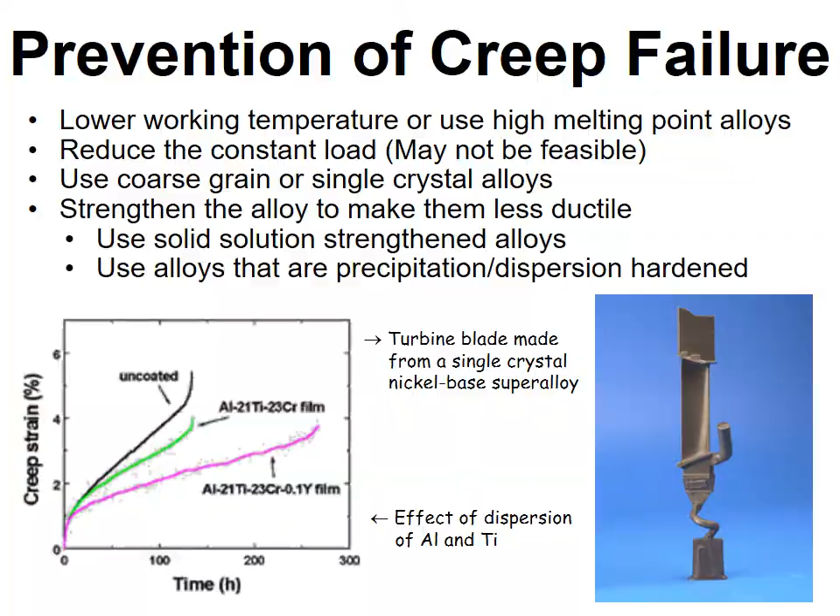Before we end this topic on creep, let's recap. Creep can be defined as a time-dependent plastic deformation that takes place under a constant stress at elevated temperature. Its deformation shows three distinct stages, where primary creep shows rapid extension at a decreasing rate due to strain hardening, followed by secondary creep, which proceeds at a constant rate as thermal softening balances strain hardening.

This eventually leads to the tertiary stage, with increasing strain rate leading to complete fracture. Prevention methods include the use of alloys with high melting point, alloys with coarse grains or single crystals. Last but not least, alloys strengthened through solid solution, precipitation, or dispersion hardening process.